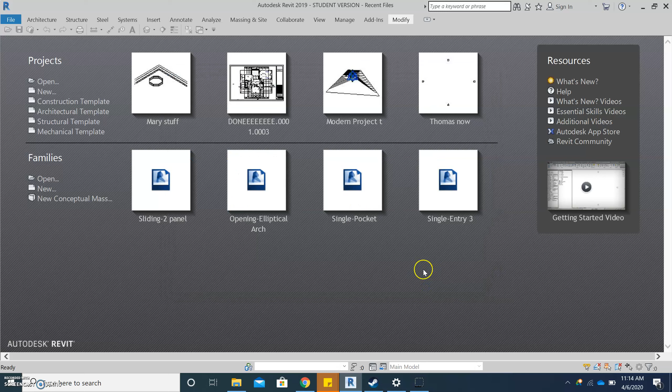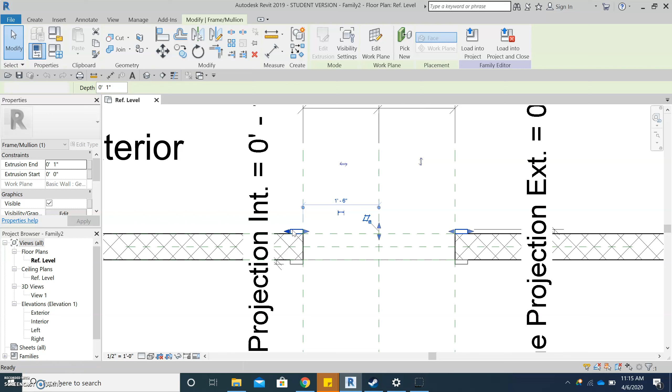And the first thing we need to do here, so we have the door opening already set in place and it automatically generates a frame for us, which for this we're going to take out the default frame because it'll just confuse the issue because we're going to be doing some things with reference planes and lines. If you try this and want to add a frame back in afterwards, it's extremely easy to do that.

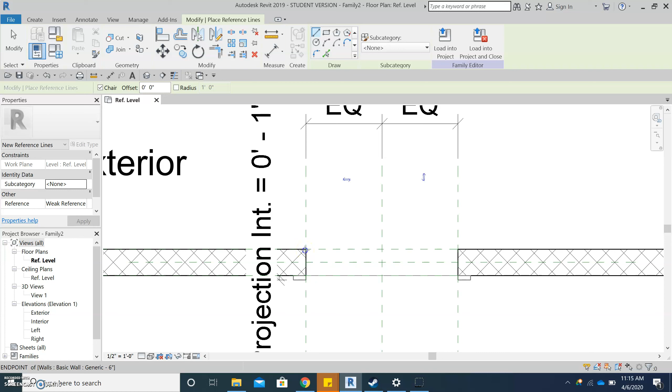Alright, the first step, create a reference line. And you'll want to center it on this side of the door frame. I'm setting it to 3 feet because that's already the length of the door we have.

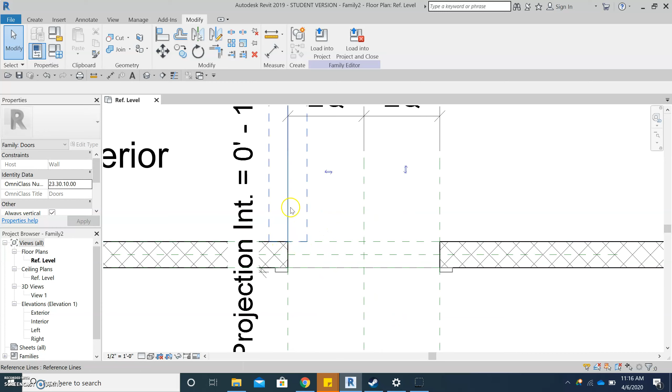The second step is to align it with the reference planes controlling the door. This is so when the door swings open and closed, it doesn't pop off its hinges and move backwards and forwards because that is not what we want to do here.

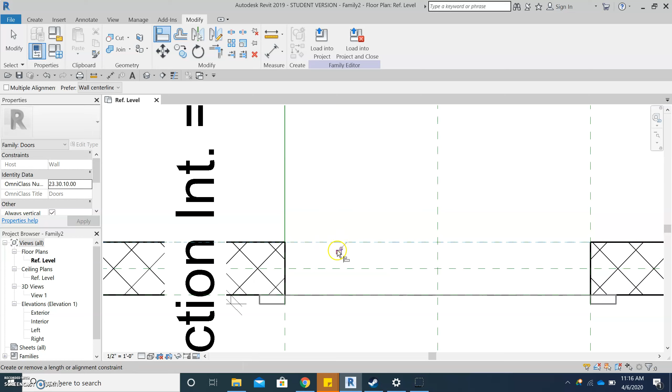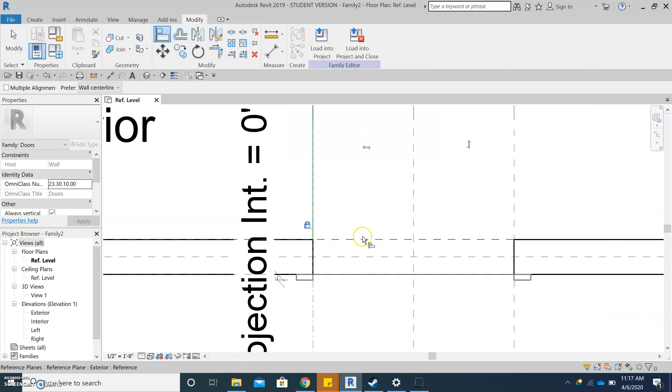So you'll want to grab the end point of the reference line, not the reference line itself, to lock it in so that it can still turn even though one end of it is locked to the reference planes. Alright, then we need to test it and make sure that worked. Safely locked in.

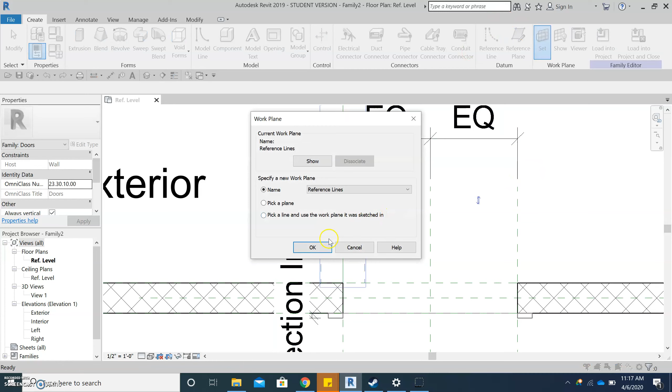So then we need to go to setting a work plane and pick the reference line we just made. Check that it's set that way. And then we can start creating the actual door panel. So you'll want to do a rectangle, start at the end point of your door panel. It offers us a lot of locking options, but you'll only want to pick locking it to the reference line. That means it can move back and forth still.

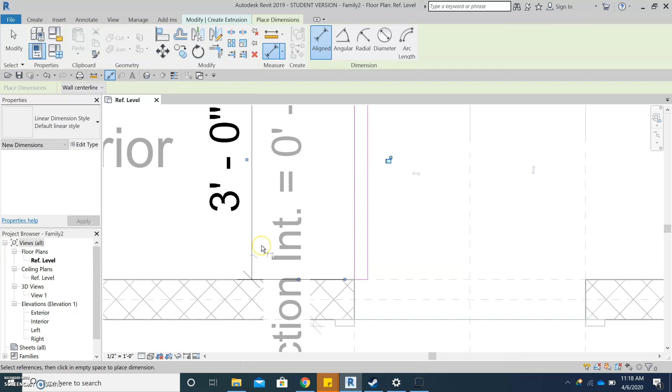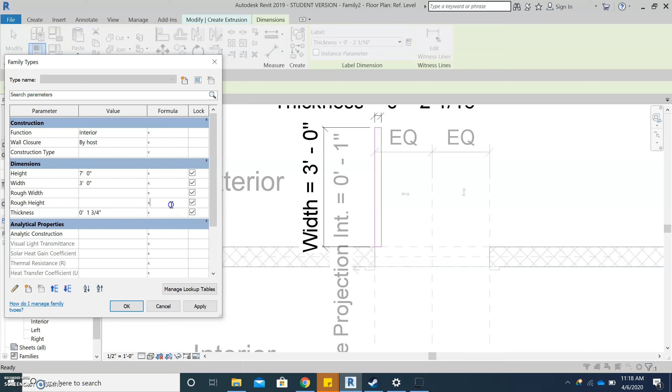We're going to set these parameters to the width and thickness of the door. We're going to go into family types and change that thickness to the standard for doors, which is 1 3/4 inches. And then close. And here's the moment of truth. This step only works the first time about 50% of the time, so let's see if it works for us today.

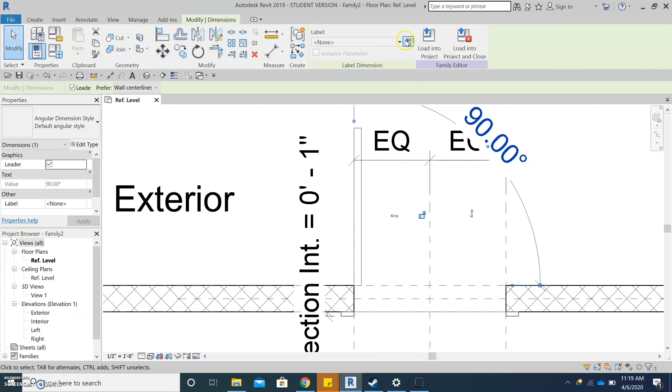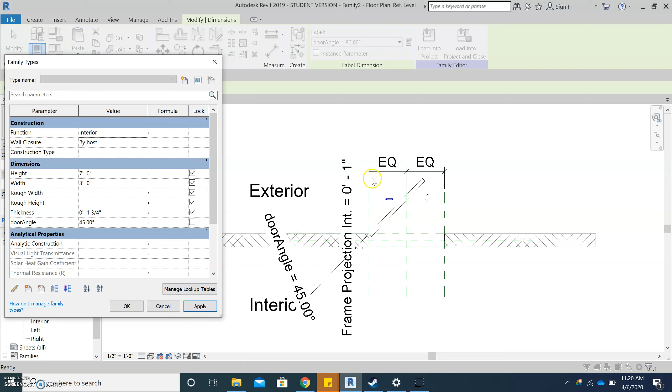Creating an angle dimension. And there's no parameter for the door swing as of yet, so we need to create one. That flipped it over backwards, but that's not necessarily a bad thing. Alright, and then you set it to 45 degrees, and that is working for us. So let's check it out in a 3D view. So there you have a door panel.

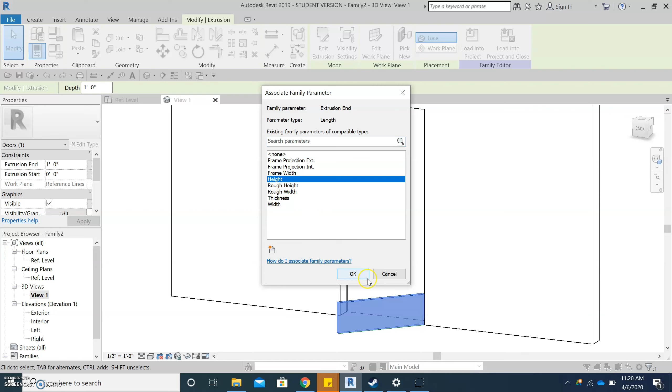It's very short at this point, so we need to go to the extrusion end, change it to the height of the door, and there you have a door. You can change the door swing, by using the family types, to whatever size you want. We can do 65 or 23.

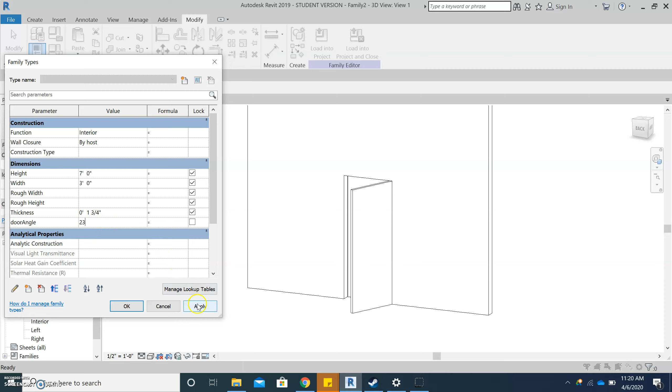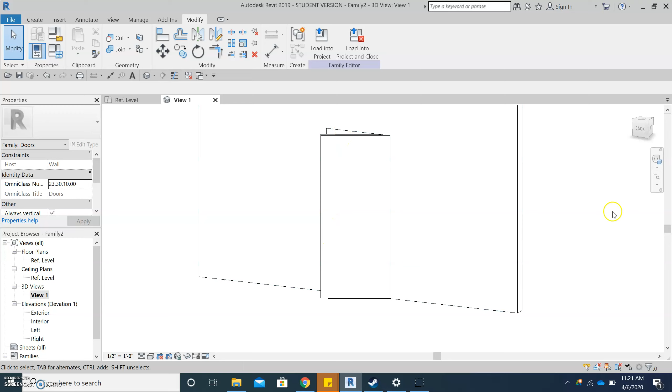And this is really good because, as we were mentioning before, there are some pre-built door types in Revit, but often they are not exactly what you envisioned for your project. And when you know how to do this, it also helps to customize your projects and make it look more professional.